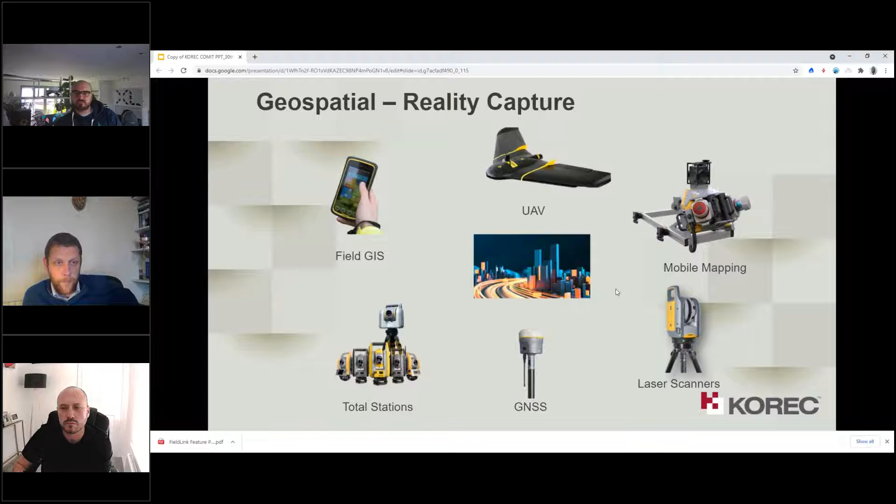The other side of our portfolio is what we call building construction, where we work with Luke and the team at Trimble much closer, focused on the actual construction phase itself. Here we're talking about survey, mapping, and technology solutions focused around bringing the design into the field, whether that's accurately setting out where something should be built using robotics or GNSS, or laser scanning for construction validation. It's also the area where mixed reality sits, whether for collaborative site briefings or looking at construction progress and validation.

Because of that, it's kind of central to this idea of connected construction, because what makes connected construction or digital construction work is that model, that BIM model, or centralized model that should be the single source of truth. The technology we're talking about here, inclusive of mixed reality solutions, is about bringing that source of truth into the field and getting all stakeholders using it, validating against it, and updating it as quickly as possible. So it is very much key to an optimized connected construction workflow.

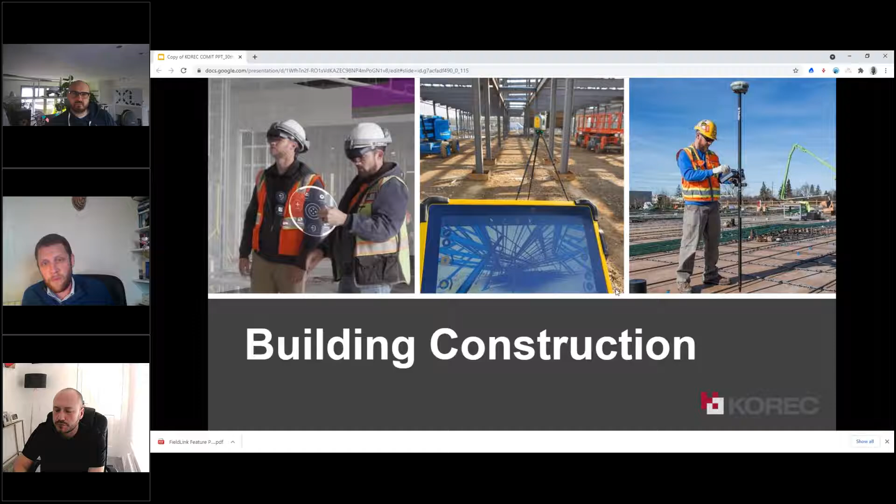When we're talking about what connected construction is, it really is digital construction. It's about embracing technologies, having that single source of truth, removing data silos, increasing collaboration with different stakeholders, reducing the lag time between what's happening on site and what we're designing in the office. Using survey and measurement tools, it's about capturing accurate information on which you can make informed decisions. These are the key elements of connected construction, and the key things that are going to drive productivity. It's very much the route we're going down in this industry, and you can see the advance in recent years and the investment in this space—technology is transforming how we construct infrastructure, and mixed reality is a big part of that.

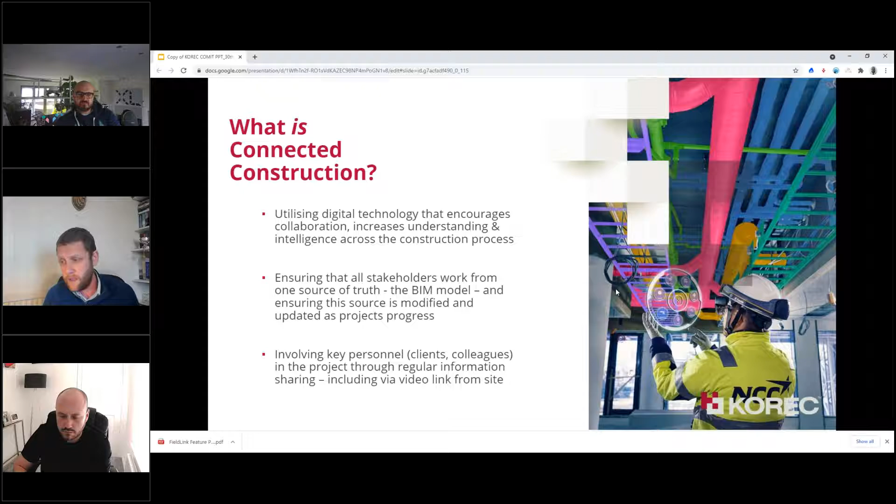So that's probably enough from me. What I want to do now is hand over to Luke, and he'll go into more detail about what the XR10 is, how it works, and we'll look at some of the different applications it's being used for. Over to you, Luke. Perfect, thanks, Mark.

I think that was a great introduction, and honestly you took a few of the words out of my mouth in terms of how mixed reality plays into connected construction and the overall strategy. I can't think of a better example than the mixed reality portfolio of Trimble achieving its mission. Trimble's mission statement is transforming the way the world works by connecting the physical and digital worlds. With mixed reality, we're not just connecting the physical and the digital, we're beginning to seamlessly merge them together, putting data literally at your fingertips and overlaid onto your surroundings.

So what are we talking about? What do we mean by Trimble mixed reality? In my opinion, this is the ultimate tool for bringing your design to the field. It allows you to visualize that data at one-to-one scale, in context, and importantly in safety—completely hands-free and without obstructing your view of the site. With Trimble Connect for HoloLens, we're able to extend the collaboration features of Trimble Connect, and we're beginning to seamlessly merge digital data with physical surroundings.

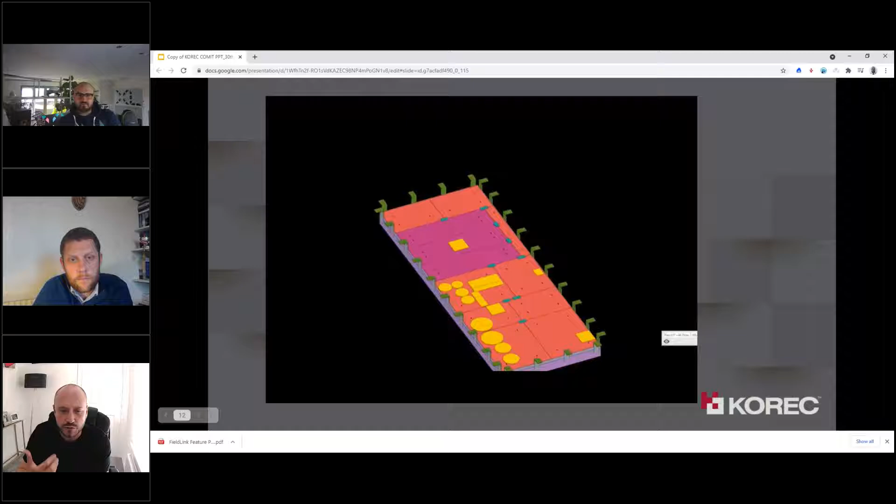They also post this neat little video from when they started with this. So you can see here using the collaboration feature for design review at a small scale in the factory office. Next stage, of course, is to then check that model at true scale against the module prior to being shipped out to site. So you can appreciate how easy it might be to make a mistake on the orientation or placement of one of these plates. Everything you see in yellow is to be removed when the M&E services are installed and are based on the coordinated model. So using Trimble Connect for HoloLens, they're able to eliminate risk from this process, and of course the associated costs that might come from reworking on site.

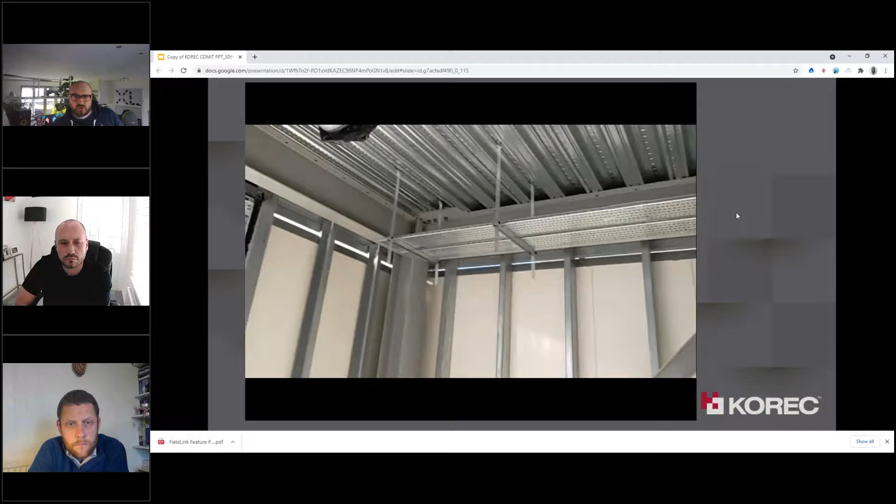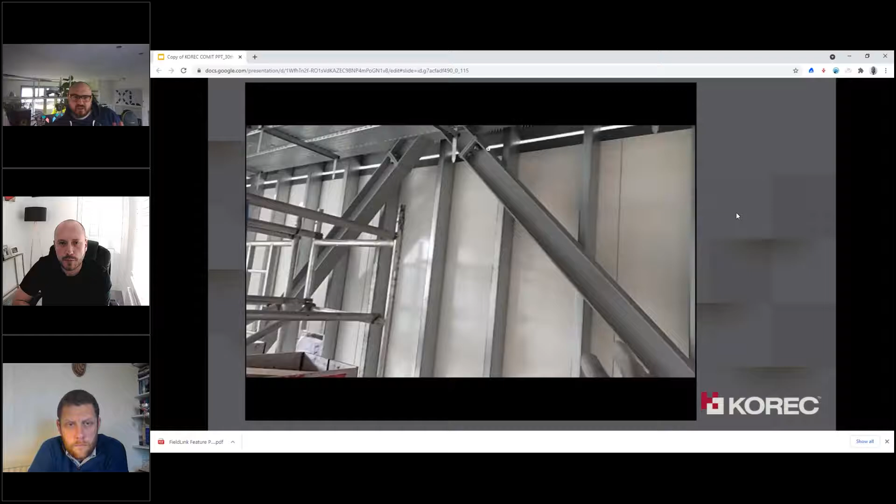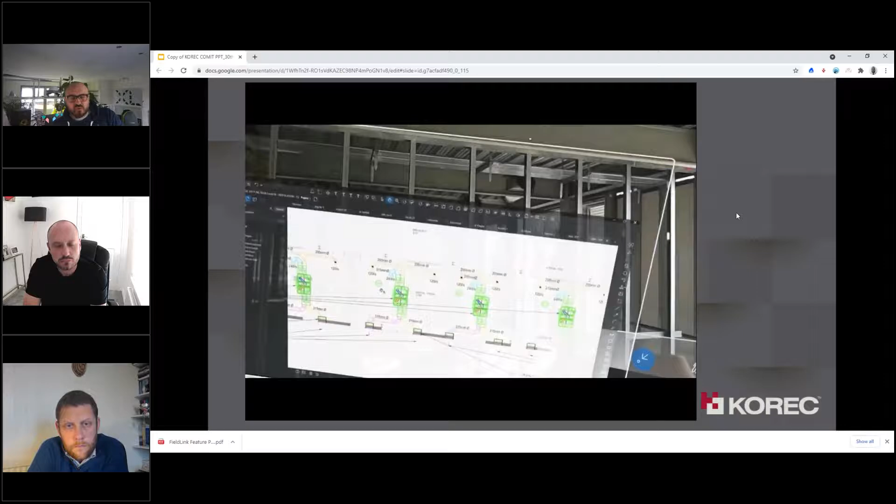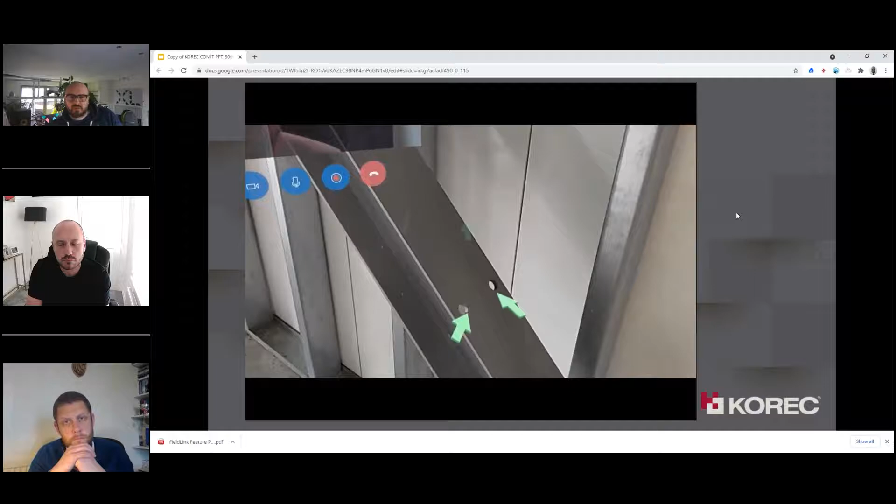I'm speaking to Adam Simpson of Clear Consulting and Design on this video here - trying to grab the screen there, a bit of jitter. But what we're seeing is the ability to mark up in 3 dimensions and have a discussion about various drawings that were uploaded. This drawing here is a CAD drawing that's been shared by the M&E consultant. It also enables us to add arrows and mark up - these arrows are actually fixed in 3-dimensional space, holographic space.

This is the structural engineers, Clancy Consulting - that's their BIM model, and the ability just to review and snag on site as well. Again, you could do freehand markups on this facility as well. So this is a live interactive design review essentially between office-based consultants or subcontractors and the site.

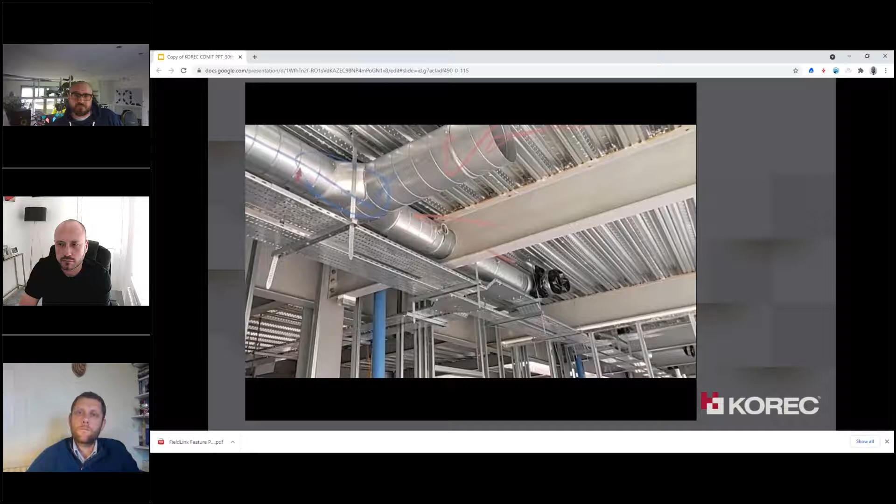So the feedback on this again was really, really positive. This is a very, very strong tool in terms of collaboration and time saving, which has been highlighted before about that travel time to site. Your hands are free, you can record the session as well, and the ability to overlay stuff in 3 dimensions is really excellent. So that got really good feedback.

There's more videos if you want to have a look on the Construct XR website, and that's probably about it from me. Probably best to get on with some questions and, you know, fire away from my point of view. Thanks a lot.

Awesome, thanks, James. That was really, really excellent and insightful, and I suspect there may be quite a few questions that are fired in your direction based on that. So appreciate that.

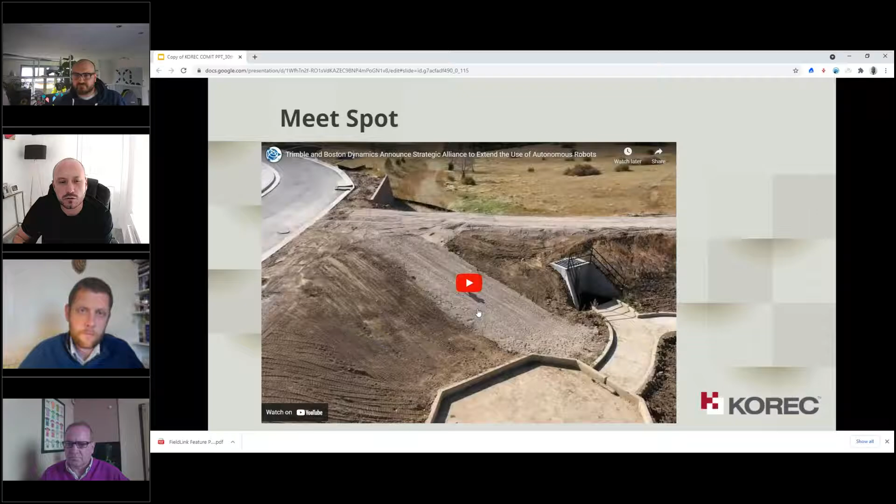I've literally just got a couple more slides in terms of looking ahead. So what's the next step? Let's talk about construction robotics, or perhaps I'll let Brian and the guys talk about construction robotics.

My name is Brian Ringley. I'm a construction technology manager at Boston Dynamics.

I actually started out with Spot originally as a customer. Once I saw the kind of agile leg mobility of Spot, I knew that was the future of construction robotic applications.

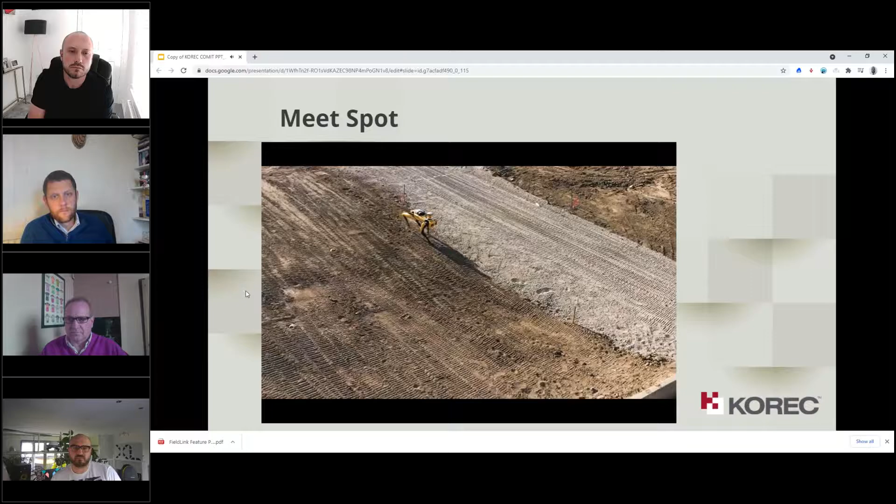In the last 5 years, Mortenson has been the #1 builder of solar in the nation. We have put in multiple gigawatts worth of work. We are out in the middle of nowhere, so transportation's a challenge, and just the challenges of getting qualified people to come and build these things. We're going to have a definite challenge to meet the sheer volume of work that's coming.

We need to be able to have the ability to turn Spot into a fully autonomous robot.

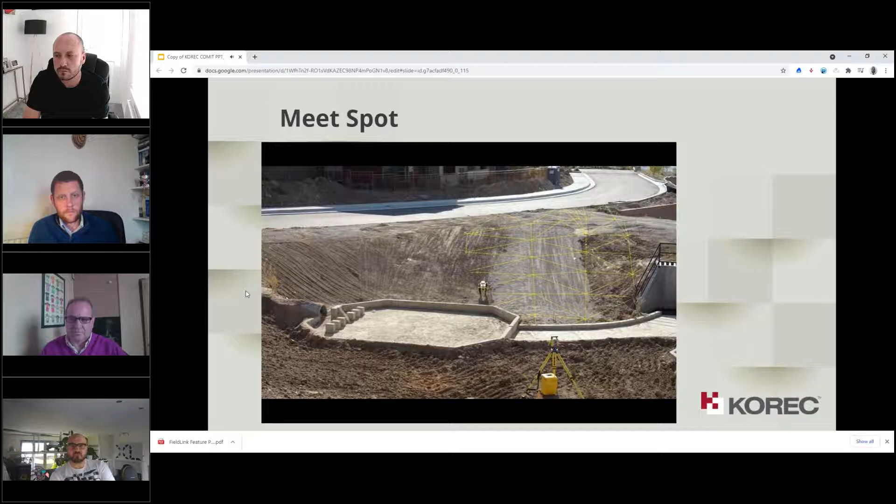We've been able to put Spot through mud, through dirt, through short grass, through gravel. The finesse that Spot has to be able to maneuver and dodge and see what's going on is quite frankly unique.

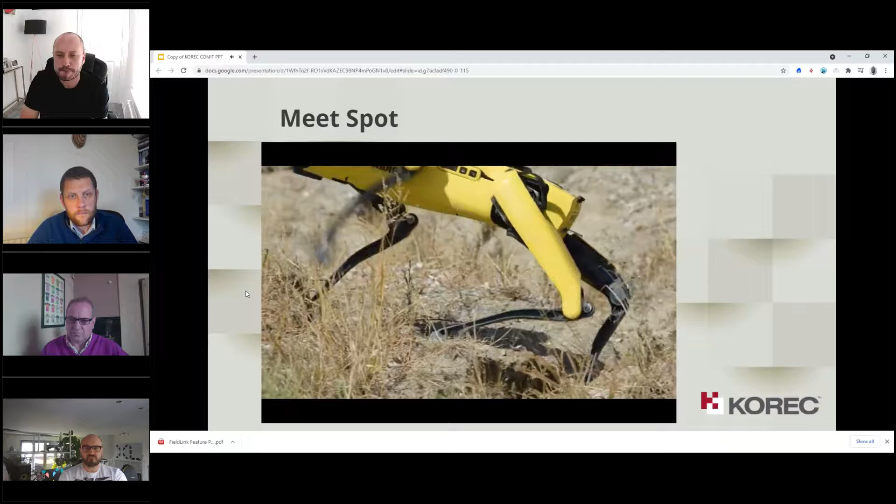We're seeing a particular amount of value in environments that are somewhat predictable, repetitive and modular. We want to use the Trimble technology to allow Spot to go deeper into exterior construction environments and civil applications.

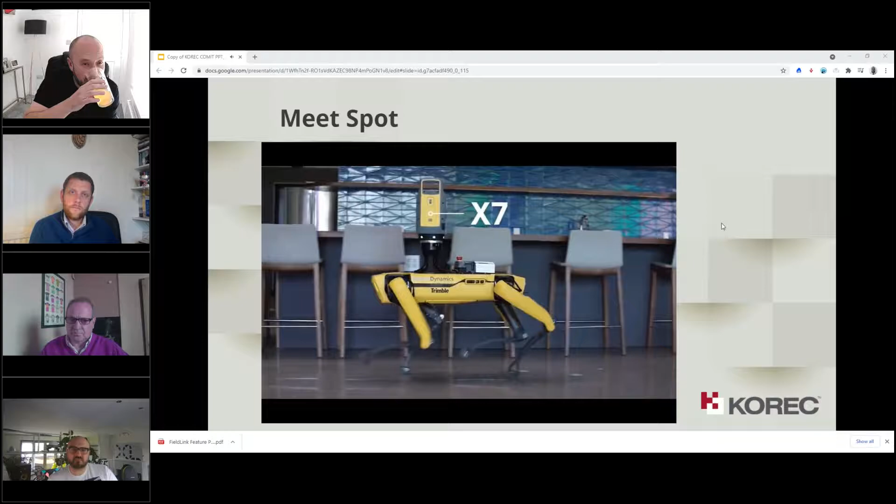One of the things we've been able to do is control Spot from a remote environment. Right now we're down here in Texas, and we've been able to view the navigation from the Spot cam and track that from Minneapolis.

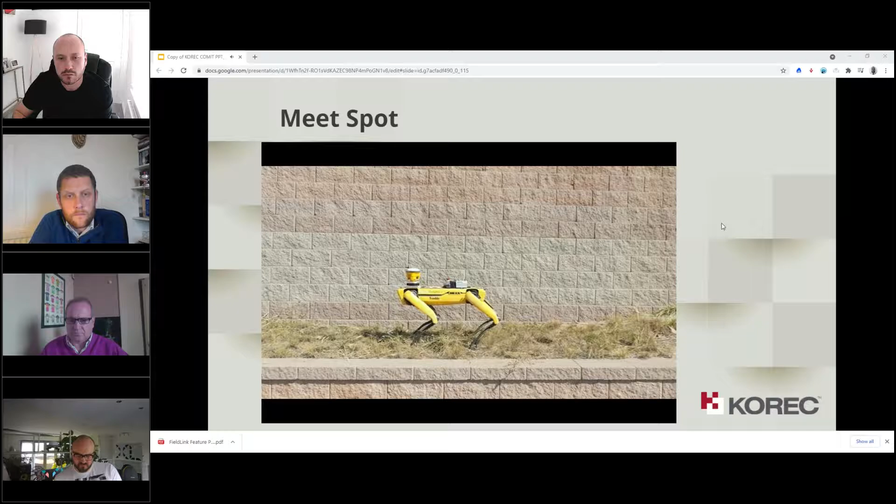It is a need for us in terms of being able to deploy multiple Spots on a job site. Having tools and technology like Spot are going to make our jobs honestly easier.

Okay, so just to sum up our vision for construction robotics. We really see the near future as being fully autonomous cobots working side by side with humans. We use this term cobots because the idea is that they're working alongside us rather than replacing us, but performing dirty, dull, dangerous tasks in turn to improve safety, quality, and speed of construction.

So we believe that robots will play an increasingly significant role in the construction industry, whether we're talking about prefab or on-site scenarios. And in a similar way to BIM adoption, I think you start looking at other industries and you can see that this trend is already in a more advanced state. So it's natural that we will follow, catch up in that sense.

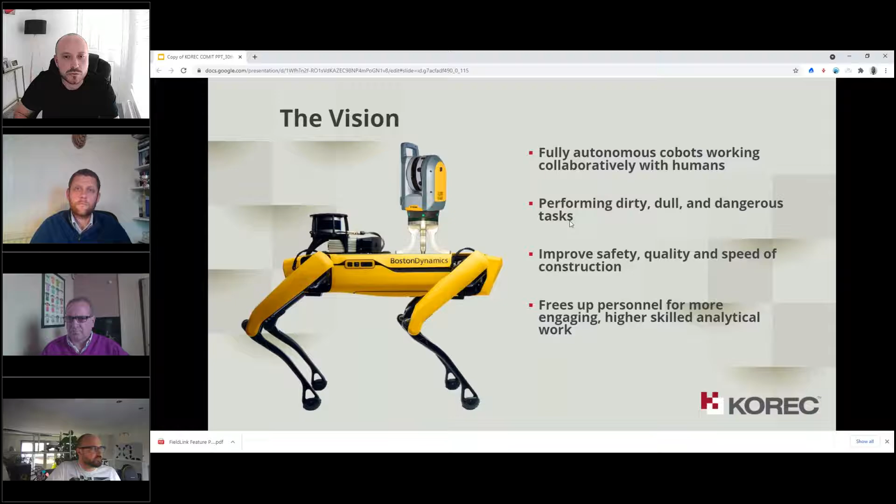Brilliant, thanks guys. That's absolutely fantastic. A great collaborative effort there, I'd have to say. Some real nuggets as well. I was quite impressed with how you can apply and use this technology, and it's really simple, isn't it?

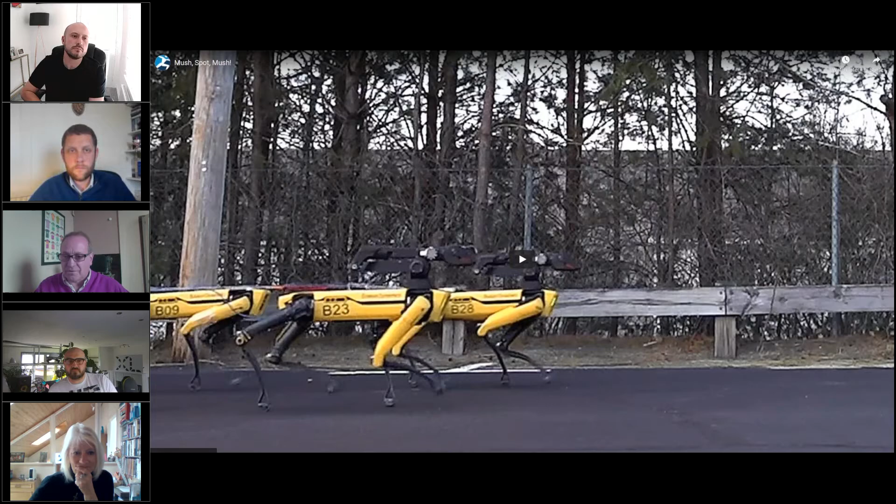It's not even wanting to play now. Oh gosh. Oh, there we go. It's playing now. There we go. So how many spots does it take to tow a 10-ton truck? Is it 2? Is it 4? Is it 6? Is it 8? Is it 10?

Well, the answer is 10. And there you have it.

Now that was taken from a session we did midway through last year with some of the Trimble guys based in the States and in Europe, Middle East, and it was actually called A Date with a Robot. It was a great session, and they talked about some of the things they're actually doing now in application, and it was fascinating. It is available. It was amazing, wasn't it? Absolutely, a Date with a Robot.